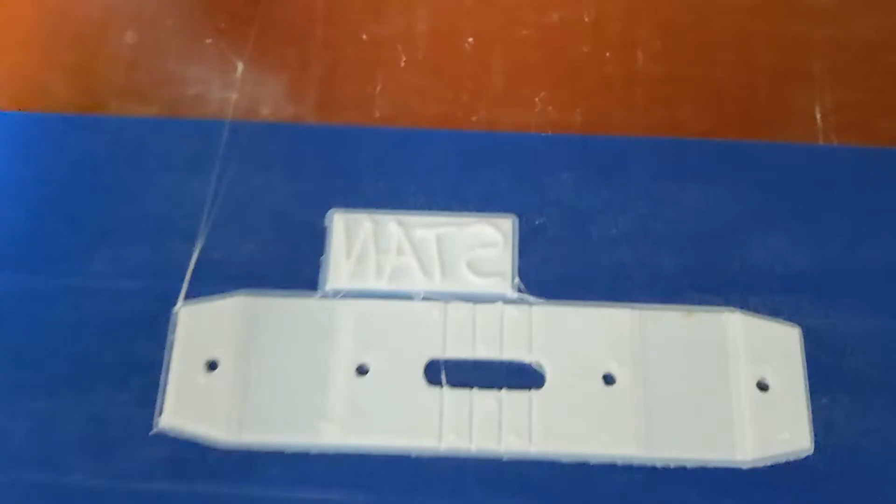3D printing is great because you can combine prints together. This is actually the name stamp I made earlier, which I covered as a short - I'll include that link up there. With this, I could 3D print my own name stamp and use it for future things. Stamp 3D print.

Growing up, I was diagnosed with dysgraphia, which is a handwriting disorder, and I've done some things in the past to accommodate my handwriting. One of them was to have a stamp made professionally for stamping my name on paperwork and homework. When I did this years ago, I took about 5 minutes, wrote my name really nice, and sent it to a professional company that makes stamps that click down. It cost me probably about $20 to have that done, and I still have that stamp somewhere, but now I've got a 3D printer.

So I was screwing around with something, and I found a couple cool ways I could make my own stamp instead. If you've got students with dysgraphia or handwriting issues, this is a really quick way in TinkerCAD to design and export a stamp and use that to accommodate their handwriting needs. And it's always cool to just have a stamp with your own name on it.

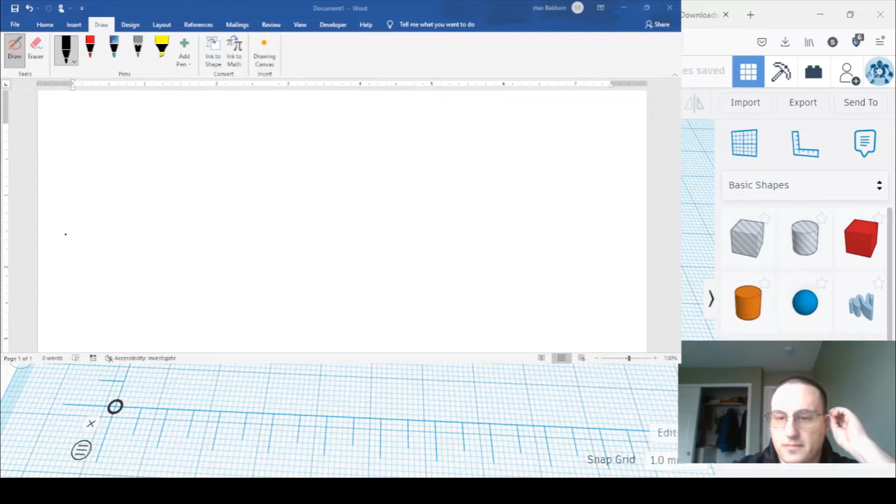I'll show you how to do this using just Microsoft Word, the screen snipping tool, and TinkerCAD. In Microsoft Word, open up a document - you have your home screen here, but we actually want to use Draw. This brings up a set of drawing tools you could use to draft anything you want. I'm going to make the line on this really thick.

What's cool about this is you could even use your touch screen as a drawing tool.

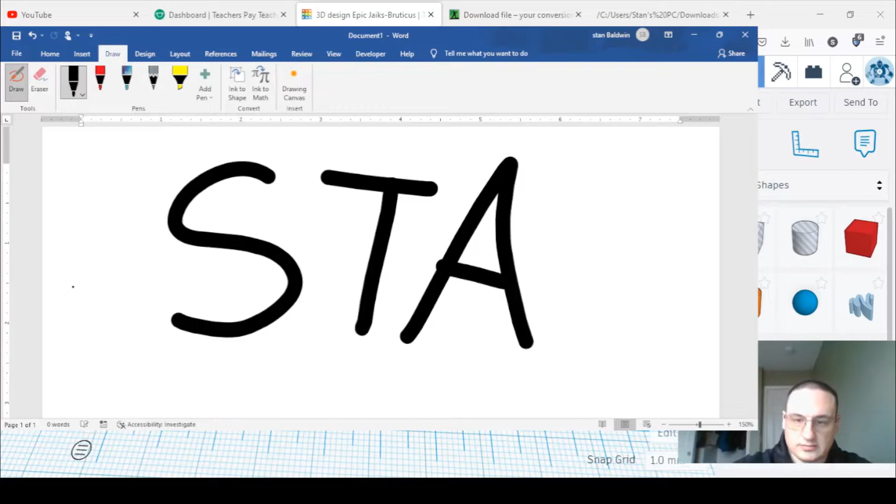Once you have that done and you're happy with it, we can go on to the next step. Once you have this beautiful signature, the next step is to capture it.

A Word document won't let you export this as a picture, but you have everyone's favorite tool, Screen Snip. So press Shift Windows key S.

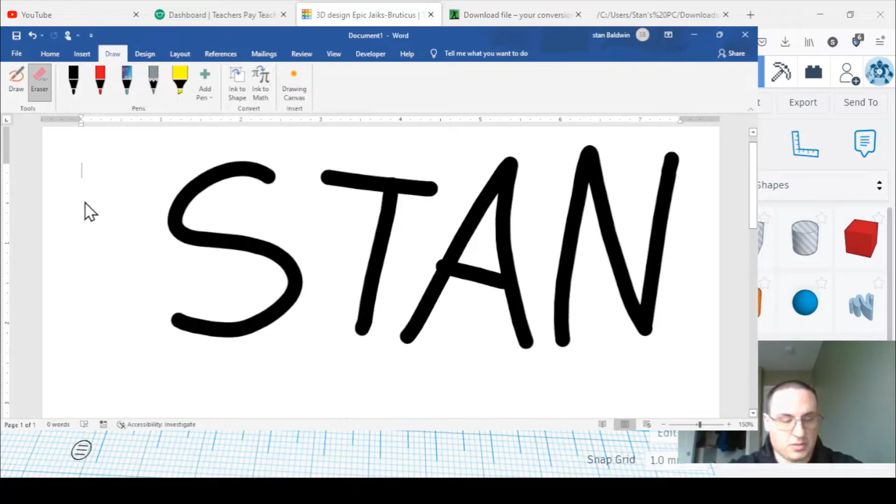That's not it. I'm going to screen capture this whole part. In Snip and Sketch, this will give you a form that you can save.

So I'm going to go ahead and save that. I tried earlier and the line was a bit thin, so definitely use a thicker line, especially when you're 3D printing, because some nozzles will get pretty thin.

Once I have this saved, it's now savable as a picture, and I just have to convert it to an SVG. I'm going to take this file here and convert it so I can get it out of the way.

I'm going to use onlineconvert.com to turn it from a JPEG file to an SVG. So download that, then click start, and give it a moment to process, then download.

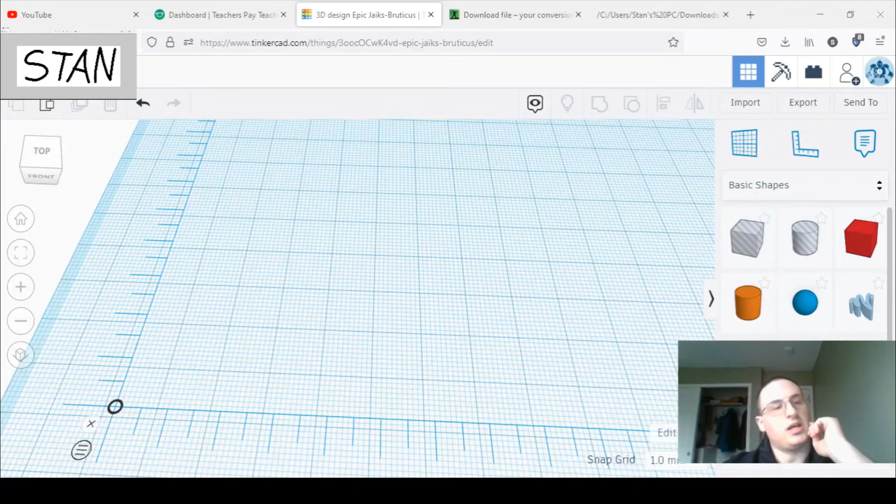After opening a new TinkerCAD document, I'm going to import the file and choose this one. Now, it tends to blow things up really bad, so change your scale to like 20%, then import.

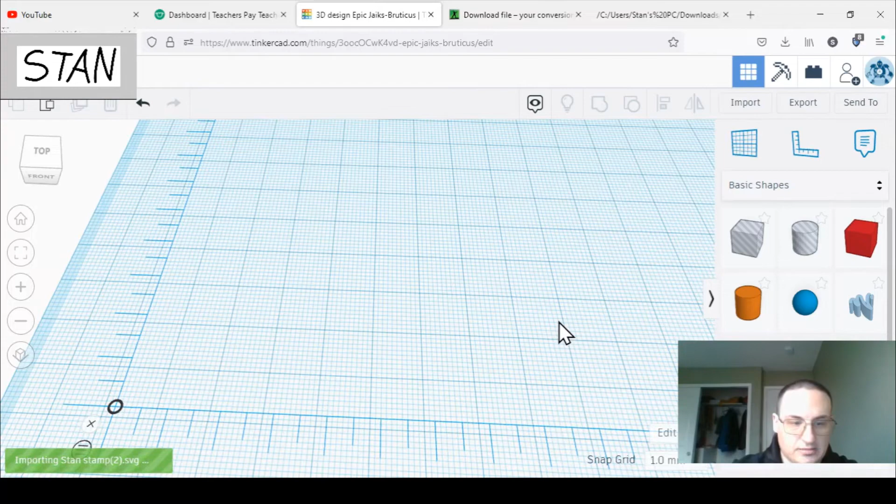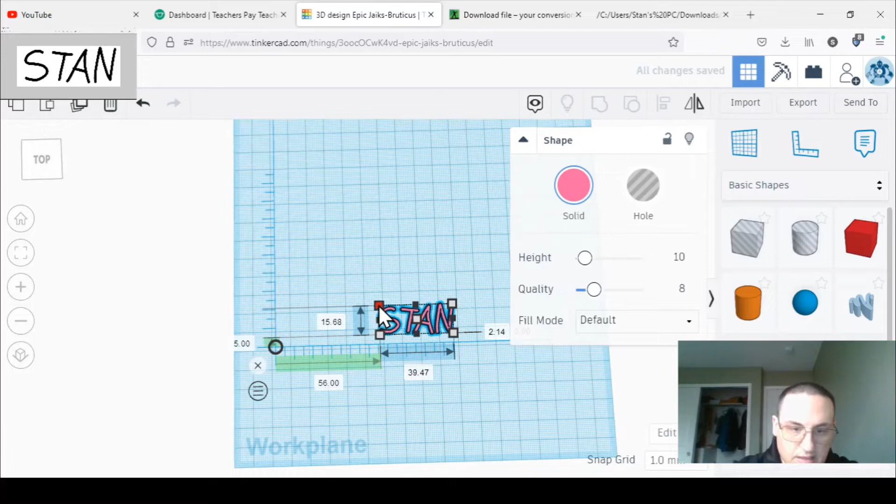That's way too huge for a stamp, but I could hold down the Shift key to shrink it uniformly. A little more - right now it's about 40 by 15. Let's shrink it, make it even 10 high.

Once you bring in this shape, you can play around with it - let's try changing the quality. The fill mode is interesting because it's got a silhouette mode, outline, and sharp.

You could actually use this mode here and make yourself some cookie cutters, possibly. This would be a fun one to play around with in the future - outline, inner line.

But I'm going to go back to the default. Now, every art major here is going to yell at me if I don't do the next step. If we want this to print on paper, this has to be flipped. The way we do that is right up here, there's a mirror tool. When I do that, it gives me this option here. So now Stan becomes NATS, and I could go from there.

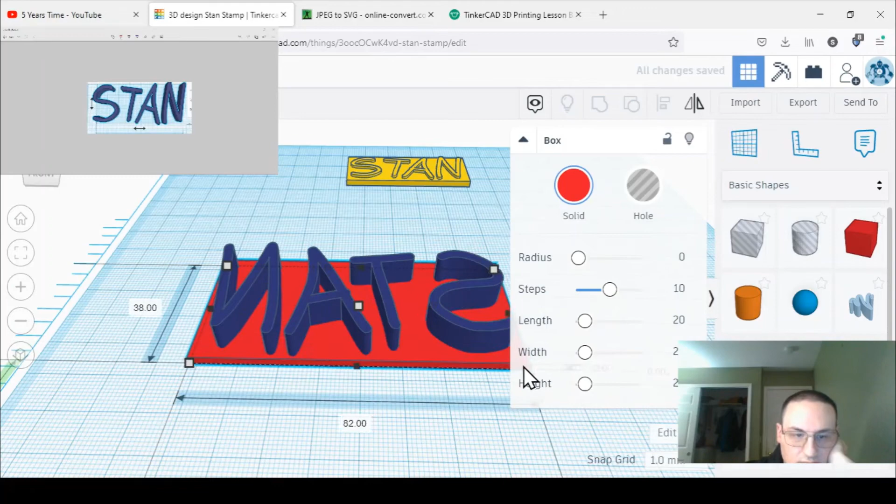So you can see up here, I started with my name like this, written correctly. Now to make it a stamp, I have to flip it. By itself, it's not supported. So I'm going to take a box, smush it down, make it maybe about 2 millimeters thick. Whoops, not 23. 2. Stretch it out, and just get it to cover the base of what I need.

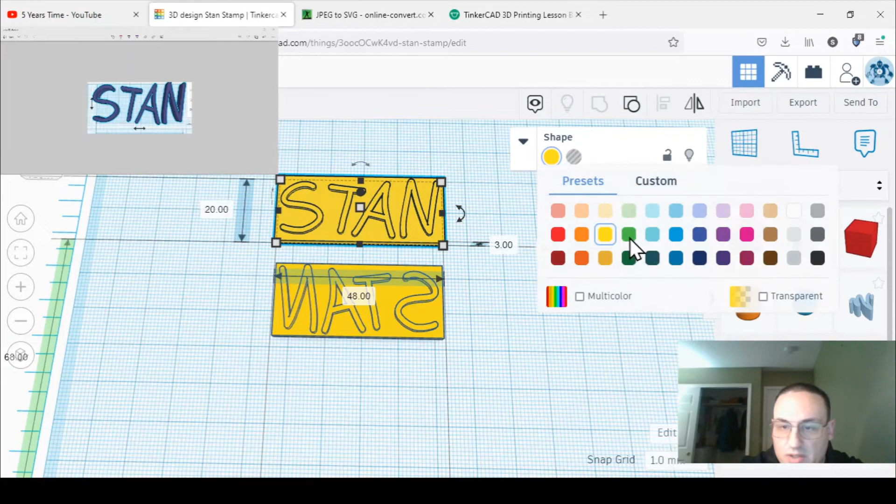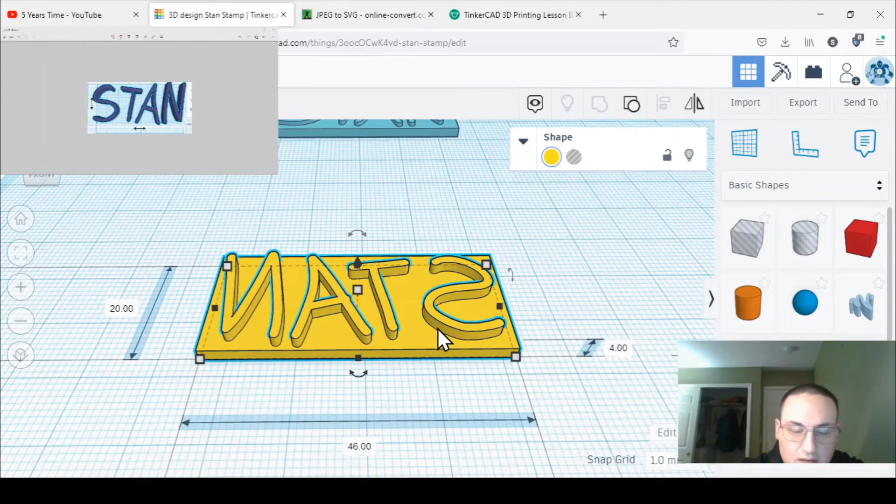So here's a quick check to see if your stamp will work. If you look at what it looked like from the start here, this one, which I'll turn light blue, if I try and stamp with this, it's going to come out backwards. So it should look like this, and it should be reversed. When you print it, it's about 4 millimeters thick, so I resized it down, and about 20 by 46 is enough to fit on that line space on most pages. So make sure the stamp will actually fit in a reasonable signature line on a document.

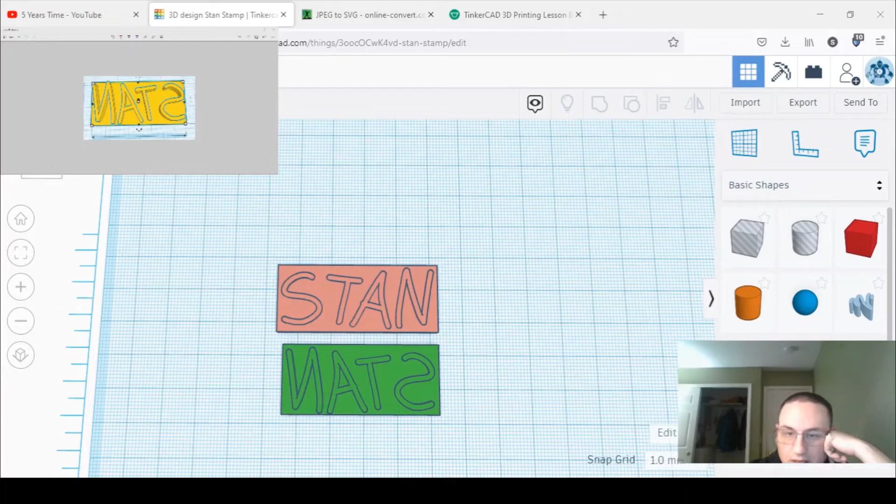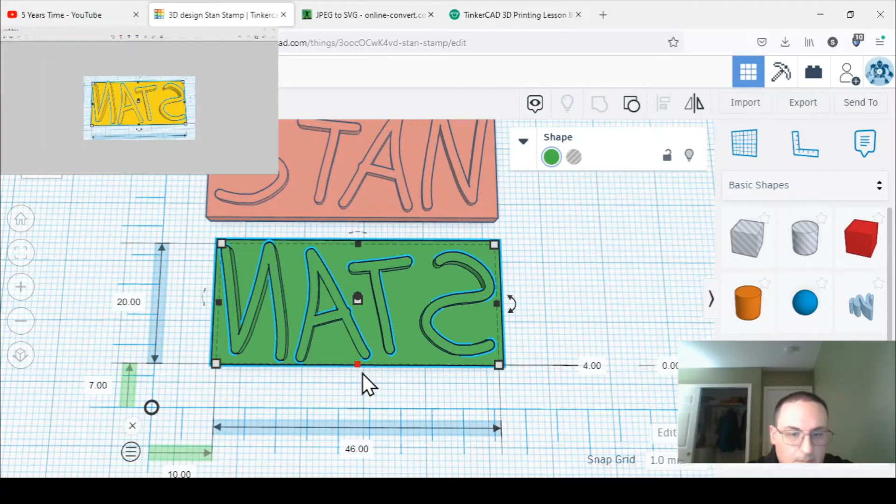So make sure to check your stamps when you're done. If it looks like this red one on top, it's not going to stamp correctly on paper, but the bottom green one will. Also check the size. You could focus on that and use your ruler tool, or R. Now this is 20 by 46 millimeters, so that's actually about the size of what you see on top of most signature lines. Make sure to check against what you generally get for homework and size it like that.

And when it prints, this should only take me about half an hour to print. You could do this in flexible material like TPU or rigid filament like PLA.

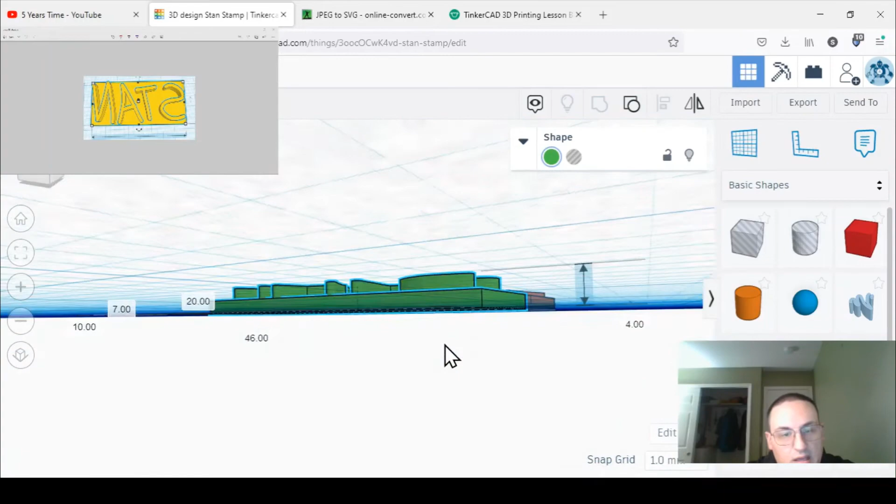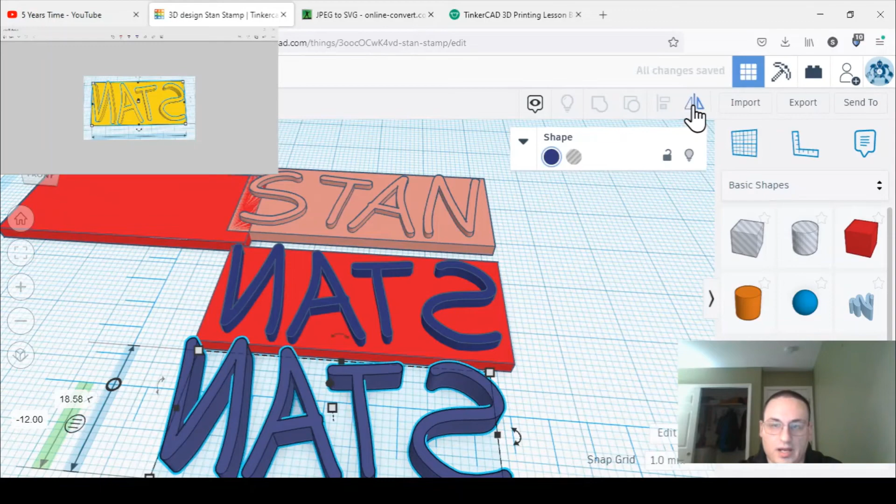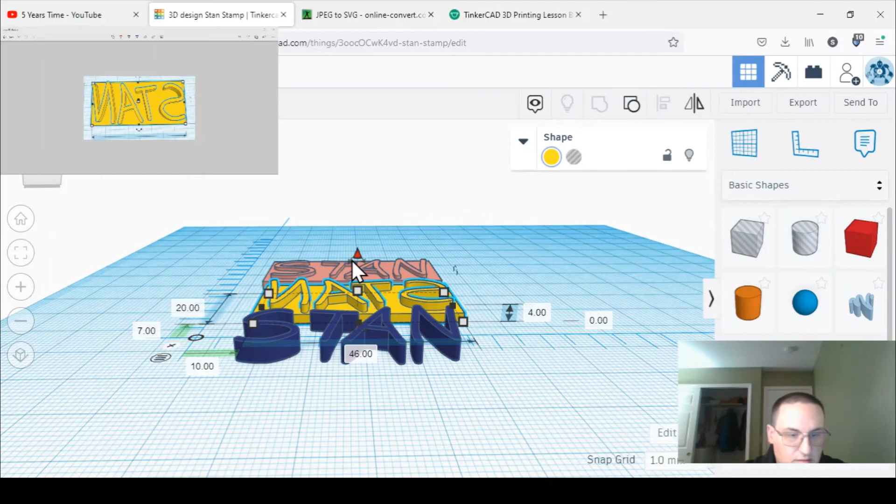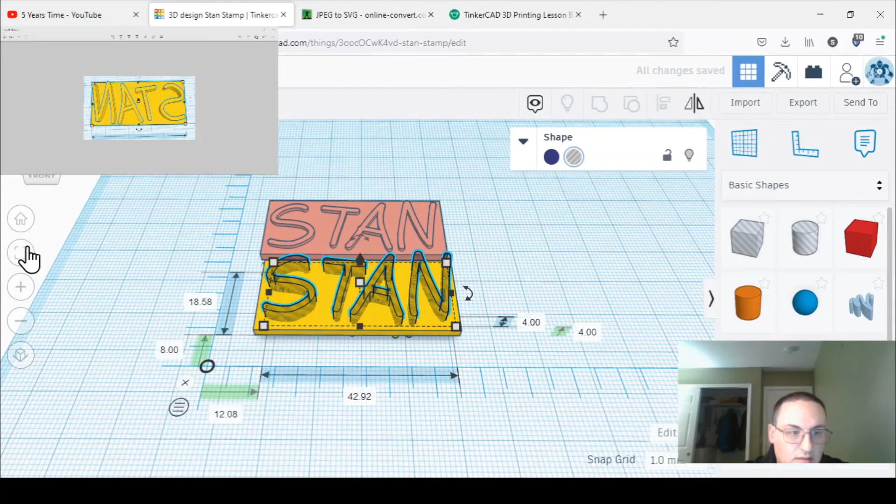And if you want to have fun with this, another thing you can do, if I ungroup this, oops, come on, just want the name part. And I flip this back, get rid of that. So I'm going to group this, flip it over, bring the lettering up so it matches what's underneath. Make it a hole. Press that in just a millimeter or two.

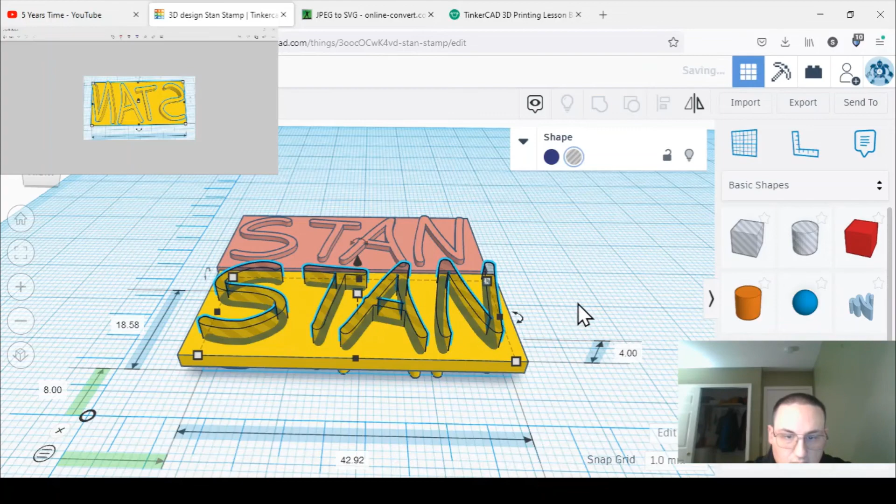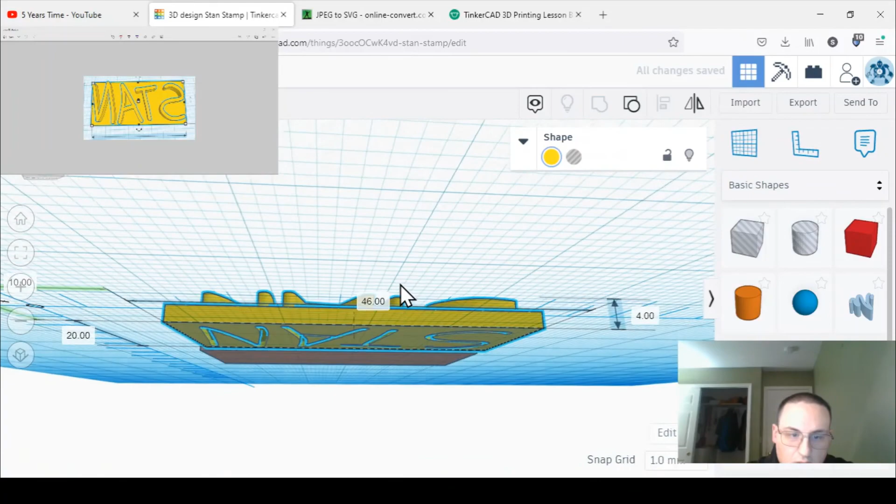And by just doing that and grouping that, it'll actually show me what it'll look like correctly. When I print it, I can still print like this. Since it's so small, there's actually going to be no overhangs required to do this. And it does sync up with what's in front.

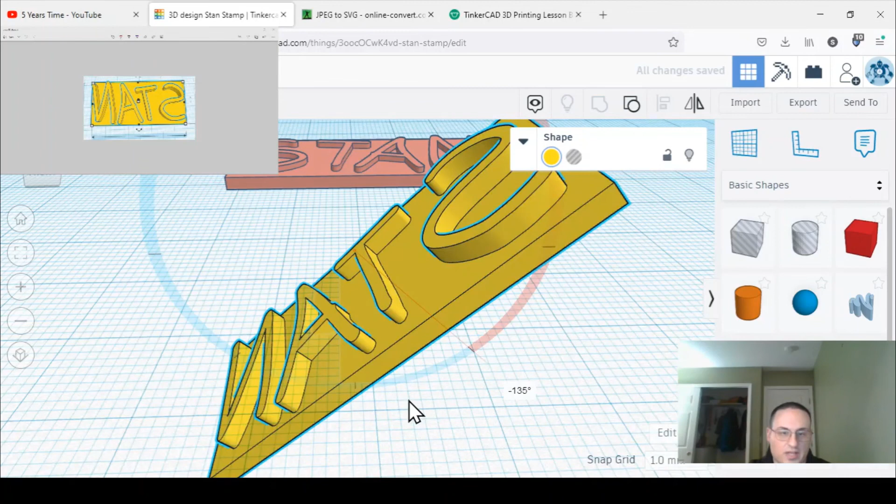So when you're ready to print, go ahead. Oops, no, don't do that. Go ahead and rotate this so it's flat. Make sure I hit the letter D to drop it onto the build plate. Then I'm going to export this as an STL and go from there.

With 3D printers, you could combine prints together. So this is actually the name stamp I made earlier. I did that as a short; I'll include that up there. But with this, I could 3D print my own name stamp and use this for future things.